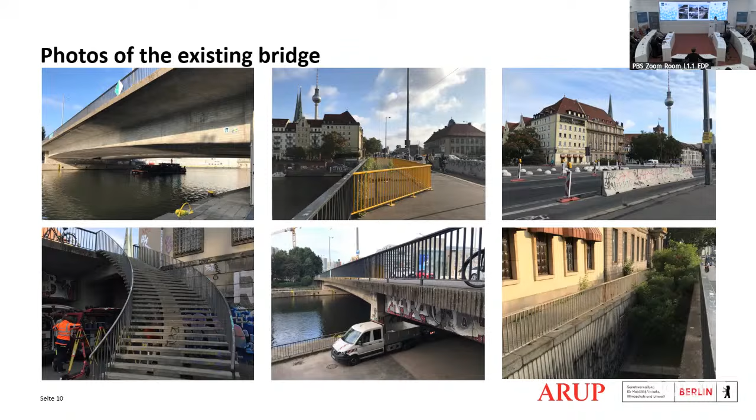So with the change of the means of transportation, the wish of the public, of the residents in Berlin, was to reduce the vehicle traffic and change the functionality of the bridge. So in the future, it will go through two phases. We will initially reduce the amount of car lanes from 4 to 2 on each side of the bridge. We will introduce a wide and safe cycling path and much wider space for pedestrians to enjoy the bridge, also stay on the bridge and enjoy the views.

And in the future, the idea is to bring the public transportation, so tram on the bridge, reduce the car traffic to just one lane per bridge, and encourage people to cycle, walk, and use public transportation.

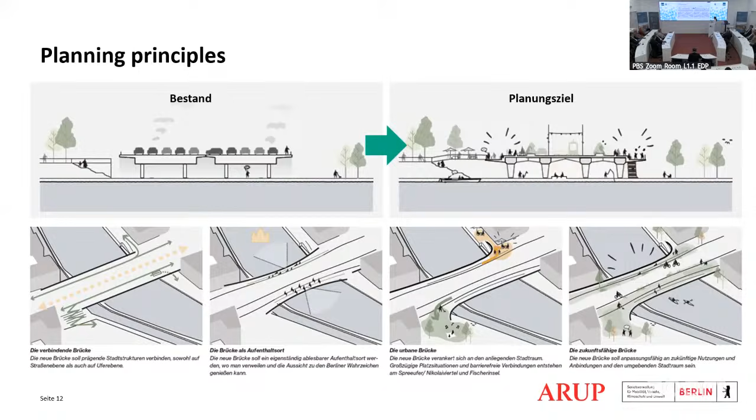I haven't mentioned, but the existing bridge is the third bridge in that location. So we are building the fourth one. And there is a lot of history in the ground as well. So the design of the temporary works and strengthening to the excavations was a different dimension of complexity, to try to build in such a close neighborhood of heritage buildings and structures.

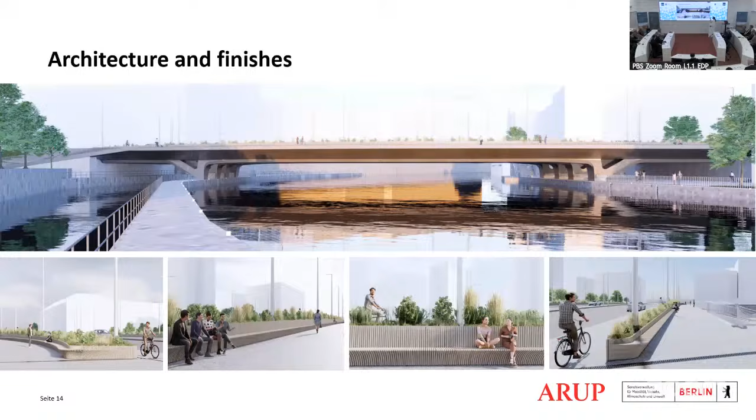So here's a little bit about the engineering behind the design. This is a composite steel concrete continuous beam. Our main beams are steel box girders with a concrete plate on top. These lines do not show a transverse beam. This is just the cladding underneath the bridge. So the structure itself is just the box girders and the concrete slab spanning between them.

Why the cladding? Not a very popular idea nowadays because of the maintenance, but actually this is coming from the approval design, which has developed significantly. We are currently about to award a contractor with the design. The amount of utilities that you can see has probably doubled. We have about 30 or 36 service utility providers or owners who each want to have a pipe, a cable, a space under the bridge because of its location. So that has been a big challenge, trying to fit it all.

And that's why the cladding, to make it a bit more aesthetically pleasing for the users of the riverbanks and also the tourists that use the navigation channel. So the width of the bridge, the existing bridge is 44.5 meters wide. We are reducing the traffic. We are expanding the place for the pedestrians, but we are still reducing the width of the bridge to 38.33 meters. And yeah, I think that's about it.

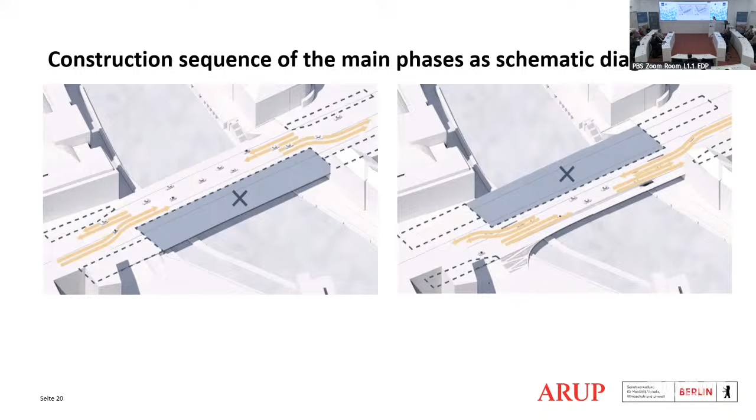They have asked us during one of the meetings to provide what they called the ship maneuvering lines, to prove that a 90-meter long barge can get through the lock, come out and move underneath the bridge whilst we have a big pile drilling machine on a pontoon next to it. So we've managed to do so. It was not an easy thing.

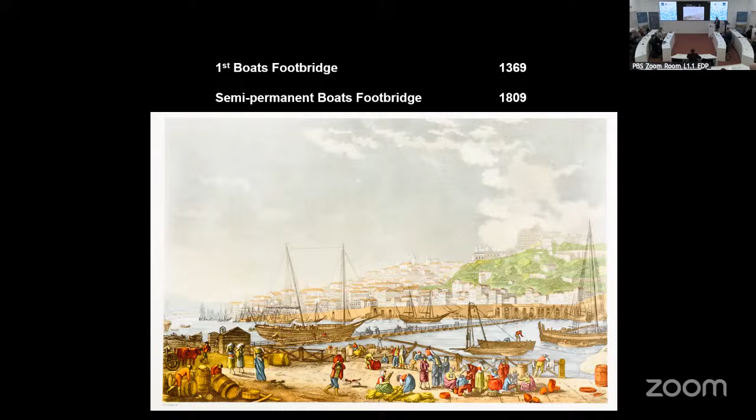It was in 1369 when, well, we are very fond of the people living on the other side of the River Douro, that is nowadays Spaniards. Before they were the people from Leon. We are very fond of them. Yeah, but friends sometimes discuss. And in 1369, an army had to cross the river to help and counterbalance the invasion that was coming from Galicia, nowadays in Spain. But the bridge was built and taken out, and only in the 19th century the first so-called semi-permanent bridge was built.

Well, unfortunately, with that bridge, we have this tragedy when the Napoleon troops came from the north, and the population tried to cross in a hurry, and the bridge was not well prepared to withstand, so several thousand people drowned in the river. By that time, people didn't know how to swim. Something that we forget. Nowadays, we are supposed to swim, but this was not the case in the beginning of the 19th century. So only in 1843 the first bridge was built, a suspension bridge, similar to many others built around the world.

Porto was entering a very important phase in the second half of the 19th century. Porto developed very much, as I said before, thanks to the British that came over here, starting industrialization and taking our port wine to be sold everywhere. Thanks for it. It's a great achievement. So this suspension bridge.

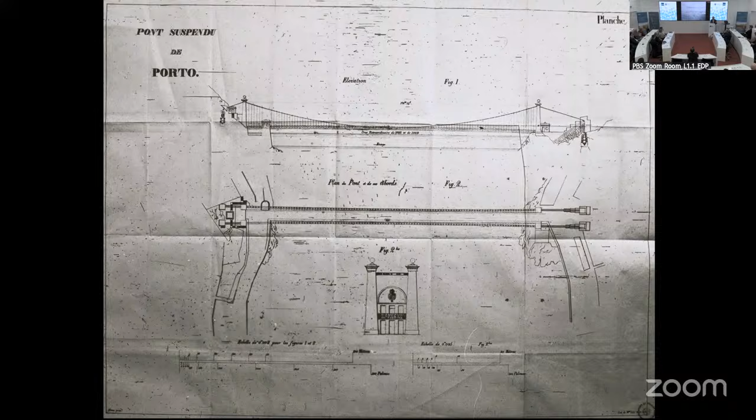What is beautiful with this bridge is also the drawings. The drawings are really to a detail. More than half of it to explain the materials, the pieces that had to be put on the bridge. Nowadays we do much less. Well, the contractor does it later on. But we are obviously not spending time with these drawings. This is already a photograph of that time.

The problem with the bridge was that it was like the Millennium Bridge, and it was difficult to cross with some wind. So apart from that, the durability of that iron, of those cables, was not good enough. Anyway, the city started to develop a lot, as I said, in the second half of the 19th century. So we had to have a crossing down here and also another up there. But a few years before, the train was coming from Lisbon, had to cross the river, and then, well,

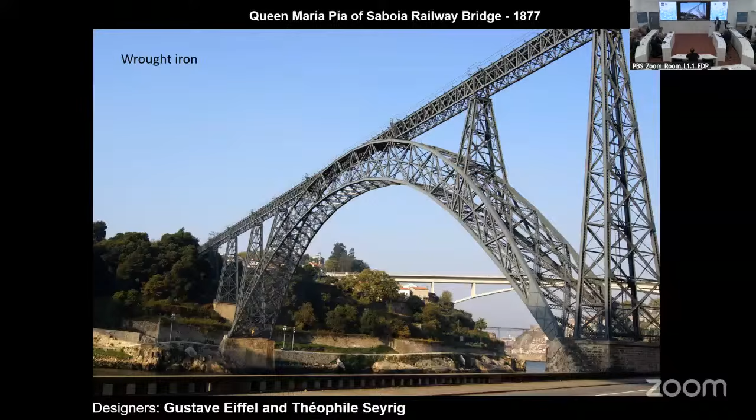So it was in 1877 that we had this big bridge built by the Gustave Eiffel Company. He came up with this splendid work of art. Théophile was actually the engineer, the civil engineer who did the calculations and the drawings. The drawings, because the calculations were graphical, and the precision with which those drawings were made, this sort of graphical drawing, well, young people don't know at all, because now it's not used anymore.

Anyway, this bridge, the way it was built, was built in less than 2 years. Less than 2 years. Gustave Eiffel was no doubt a great entrepreneur. He was a civil engineer, true, but he became an entrepreneur full of capacity, initiative. So this bridge was built in less than 2 years. Amazing. This was never done after that. So in spite of the arrival of electrical machines, etc., this was done only with human force. But this construction, cantilever construction, really is quite something.

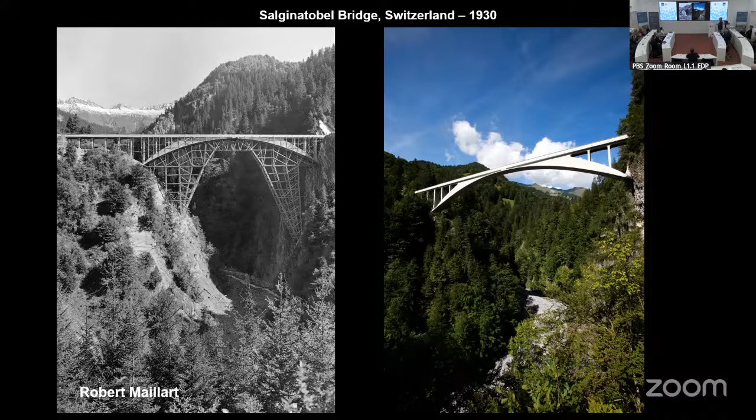I don't know why Robert Maillart comes here. Oh, I know, I see. There is a comment that in any vote on the internet for the most beautiful bridge in the world, the winner is Robert Maillart's Salginatobel Bridge. It's indeed a beautiful bridge in an outstanding location, quite obviously. But the comment is that in this bridge, we have 3 hinges.

But in the one Gustave Eiffel and Seyrig did in Oporto, we have actually just two hinges, which means a hyperstatic structure, and to calculate hyperstatic structures before we had computers was quite something. Quite something means impossible. It was quite impossible. But it was possible by proper engineering and thinking, understanding of the behavior of the structure.

So the bridge was a railway bridge. And then, sorry, I'm not mastering very well this little mouse.

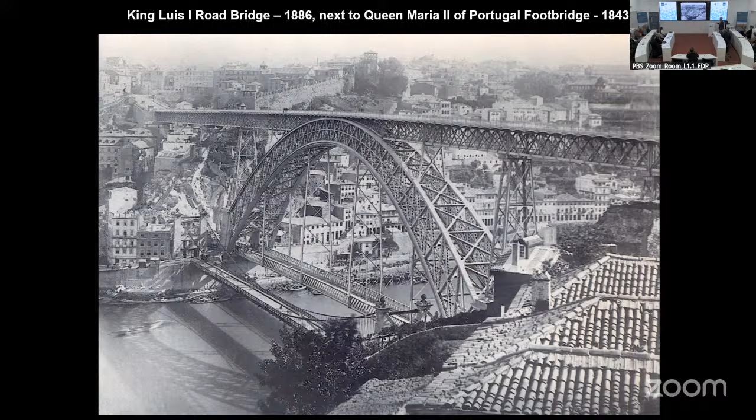Less than 10 years after, this bridge was built next to the suspension bridge already built; the suspension bridge was demolished only 2 years later. This bridge really was designed by Theophile Seyrig. Theophile Seyrig was partner of Gustav Eiffel. Gustav Eiffel took most of the credit. Seyrig didn't like that idea, so he decided to leave the company. He joined a Belgian company, and he won the competition for this bridge, still there. Probably you will visit it. There it is. It's spanning 172 meters.

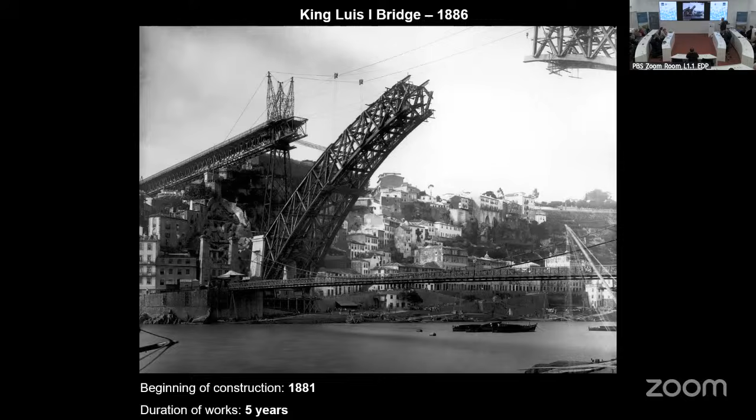We cannot go into much detail, but they wanted the bridges near the city for sure, but they were seeking the location where the river was narrow. Well, I will jump 4 meters, maybe running, but 4 meters and 20, that will be impossible. Any extra centimeter is hell and a big challenge. So indeed, this bridge took 5 years to build. Probably Gustav Eiffel laughed about the time it took to build the bridge. But anyway, both of them are still there. There it is.

The increase in traffic and economic activity on both sides was immense. By the way, the port wine was taken down the river, and the cellars are on the other side. So the wine is here, and most of the population is there. I don't know whether they were crossing because of the wine or not, probably not. But anyway, again, the same hinges, it's also an arch with 2 hinges.

And then, well, the 19th century went. Portugal went into a very difficult period, the end of the monarchy, and then 20 years of chaotic republic. I'm not criticizing the republic. It's just the fact that it was a bit chaotic. It is understood that the monarchy is a stabilizing factor. By the way, Mexicans tried to do it with the Emperor Maximilian, but then a Republican killed Maximilian, and I'm afraid Mexico, a super country, is always in some difficulty. Well, let's move to bridges and leave this difficult subject of politics.

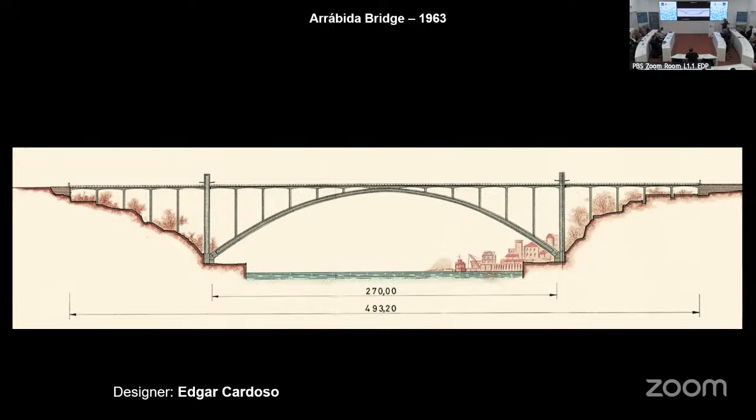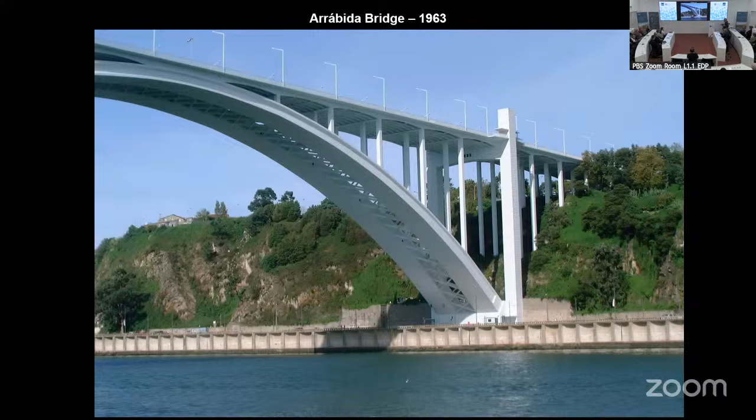It was in 1963 that this bridge was built. The designer, Edgar Cardoso. This bridge is located in a fantastic scenery. We have the mouth of the river down there. It was a world record when it was built. But world record is just a matter of curiosity, nothing more than that. And for the Guinness Book, they need to publish new editions, so they need world records. It's actually made up of 2 arches. The arches are very strong. They are self-supporting. They are 4 meters thick at the bottom and 3.5 meters at the top.

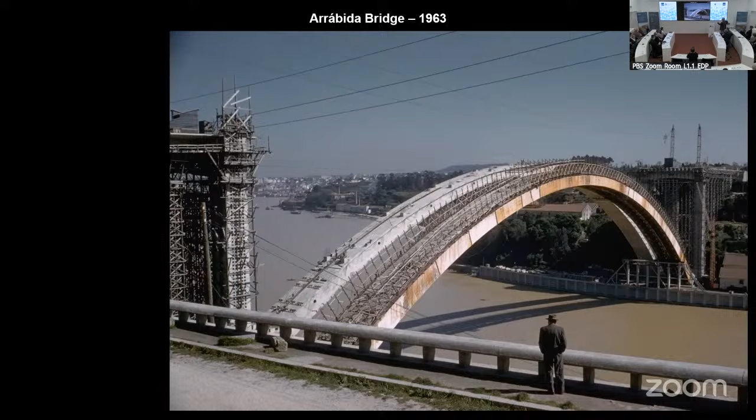The way it was built: with a temporary steel arch, then they did the concrete on top, then they moved the steel arch to the side, and they did the second concrete arch. And after having those arches, self-supporting and very strong, they built the deck with a normal scaffolding, as we see in here. There it is, the bridge in a super location. It's really outstanding, this bridge.

And it was in 1991 that we had another bridge, a railway bridge, where the train was taken from the Maria Pia Bridge, the Eiffel Bridge, and moved to this bridge. There it is, down there. Of this kind, and being a railway bridge, it is still a world record, 250 meters long, the central span.

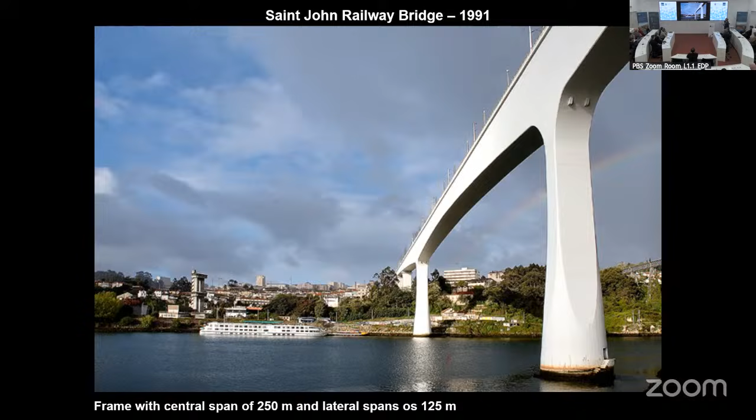Beautifully done. It may be a joke, but Edgar Cardoso said that the idea of the columns came when he was preparing to eat a carrot. Whether it is true or not, it is an interesting story. It's quite elegant, this bridge, no doubt. And the construction is a cantilever system, nowadays very common, 250 meters. You have longer spans, but not in railways. There we are, next to the 2. The train was going on the right, and now going on the left side.

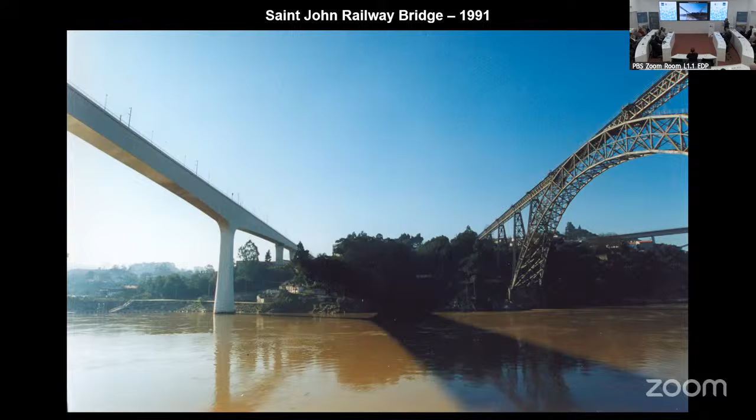This bridge is because we have Edgar Cardoso here on the left, and Fritz Leonhardt, which is obviously a well-known bridge designer, and I'm the one in the shade behind. That was 40 years ago, I'm afraid. Oh yes, 40 years ago.

And there we are, the bridge, the St. John Bridge. And then it was already in this century that we were able to have another bridge, the Infante Dom Henrique Bridge, a road bridge. It was built so that cars could be taken from the Luís Bridge, where the metro now operates.

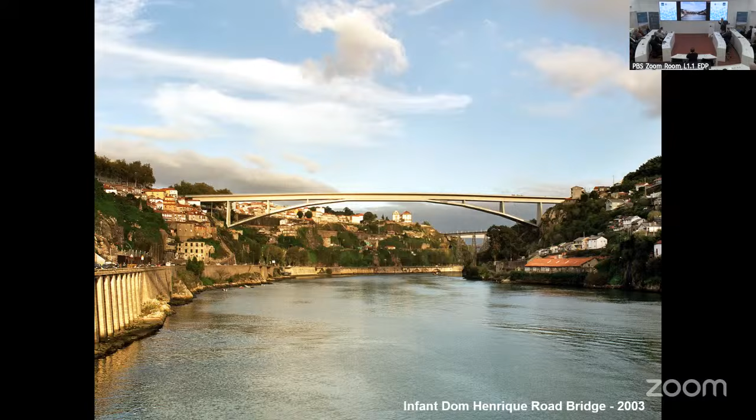This bridge was actually based on Robert Maillart's concept of a very shallow arch, a very thin arch, and the arch is not self-supporting. It would decompose if left alone. So it is the deck, the strong deck, that keeps the arch in position. And if it is in position, then it gets only compression, 95% compression, and then concrete is an excellent material. The designers are nowadays working in one of these companies.

Sorry. It's just a nice picture.

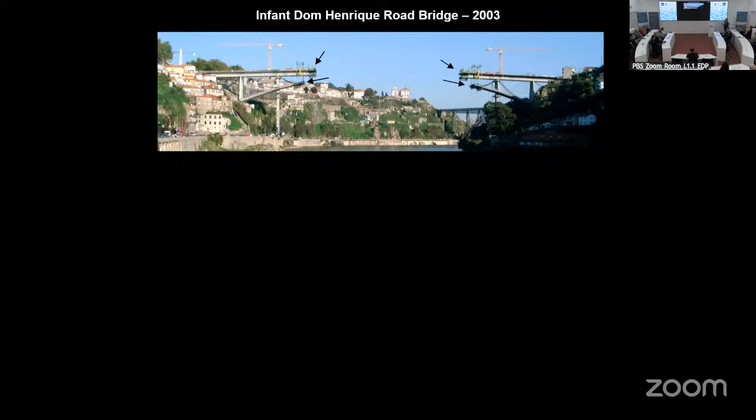In here, because the arch is so delicate, it could not be built in front of the deck during construction. It had to be hung from the deck, so the deck was ahead of the arch until they were united and finally closed. So it was quite an achievement, and provided some beautiful pictures. It took 3 years to build, so Eiffel was much more successful.

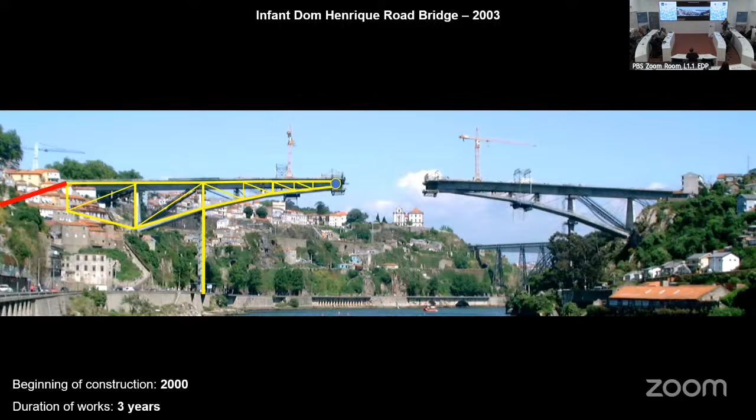The construction was possible because with temporary cables and temporary struts, we actually got a truss. And the truss is the most effective, efficient structure. After being united, there it is when the two sides are already connected, but we still have all those cables and temporary struts, like one in here, and the cables; they were all taken out.

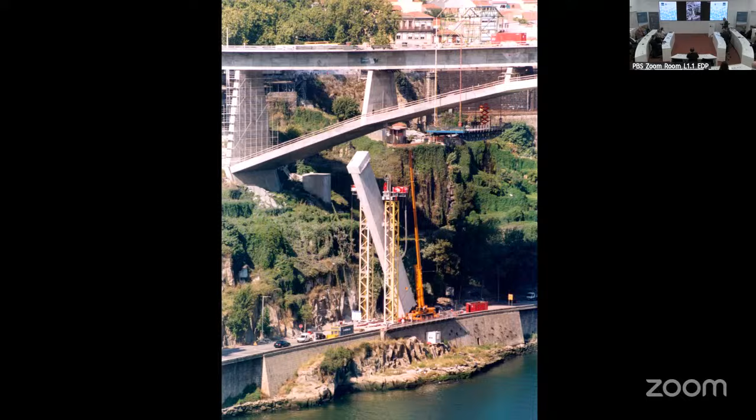Sorry, this is when this temporary column was taken down. The contractor decided to do it on a holiday over summer, because if anything goes wrong, it is better: all the newspapers and TV are on holiday. Just in case. Nothing happened, it was a success.

Amazing. Oh, sorry. Well, let's go ahead. Time is running short, and I don't want Renato to be without any time. And I still have a couple to go.

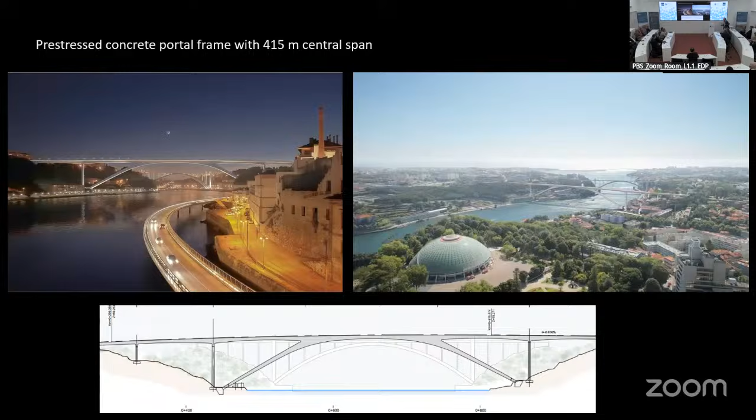It's an enormous bridge. It's got a span of 415 meters. It will be an immense bridge, no doubt. Well, we're not going into the detail. It's not exactly an arch, it's more like a frame. Although we have that shape of an arch in the middle, it's mostly more a frame than an arch. Construction is well known, with temporary columns and stays for the progressive construction, and here the picture of the bridge.

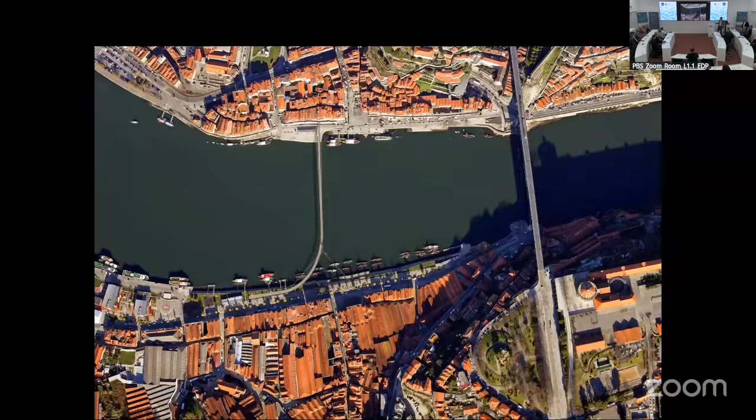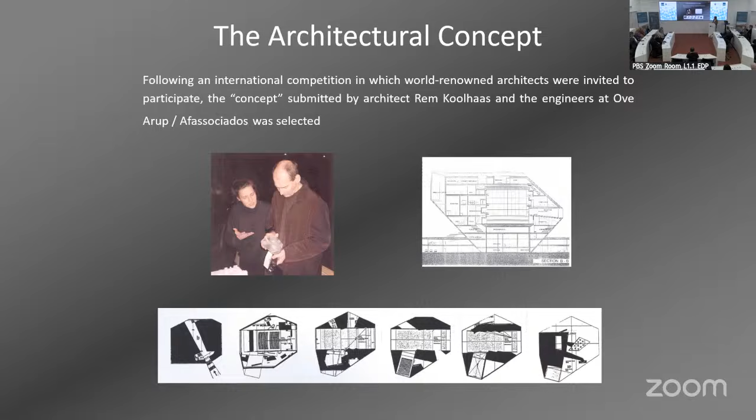So I will just try to speak a few minutes about two major structures that we have here in the north of Portugal. Both structures are, we believe, a good example of exposed concrete, one in white concrete and the other one in ordinary grey. The first one is the Casa da Música here in Porto. The architect is Rem Koolhaas. In the competition, Rem Koolhaas joined Arup and also our former company Afassociados, and the proposal from Rem Koolhaas was selected with that very unusual shape.

At the beginning, the idea was to have something that was not in concrete, some steel structure with some transparency. In fact, he didn't think about white concrete from the beginning, because in the north of Europe the skills and the labor needed to do good exposed concrete were not so common. But here in Portugal, fortunately, we had it, and I think we still have that knowledge, and the idea of changing it to white concrete was very welcomed by the architect.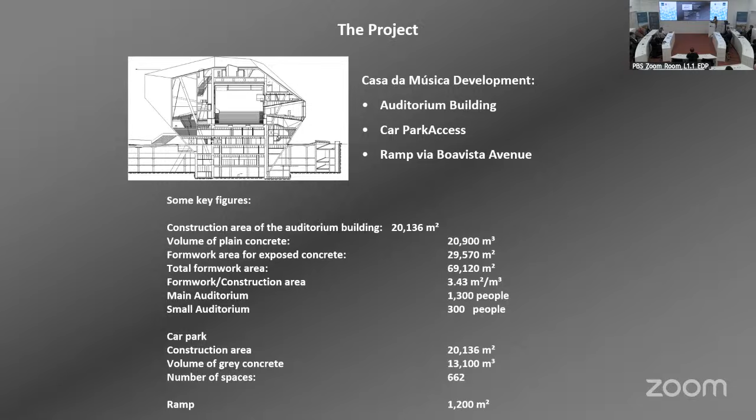We don't have time for much, just to explain. We have more or less 30,000 square meters of construction. What we see above ground is only a part of the building. The building is a concrete shell, entirely showing the structure, and that was also the idea since the beginning, to show the structure, and the structure would become the main architectural element, or the main architectural sentence, shown to the public.

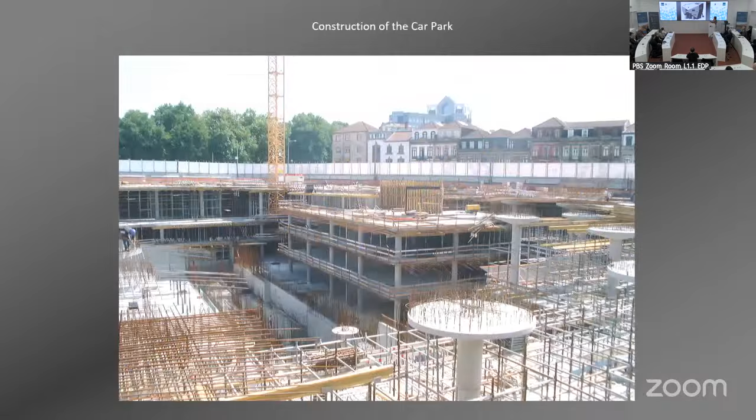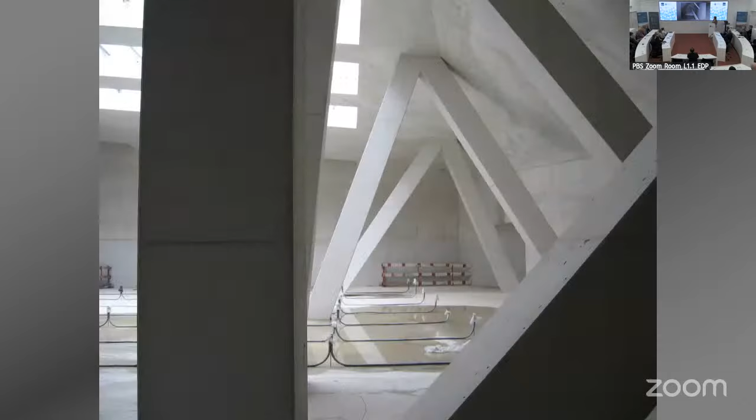The stereotomy of the exterior was also imposed by the architect, and the quality of execution was a major issue since the beginning. The result is quite good, as you see that volume in that place, the quality of execution, and the difference between the architecture of this new element and the consolidated other buildings. I think it's a very nice example of what can be done when architects and engineers join and collaborate to lead to this result.

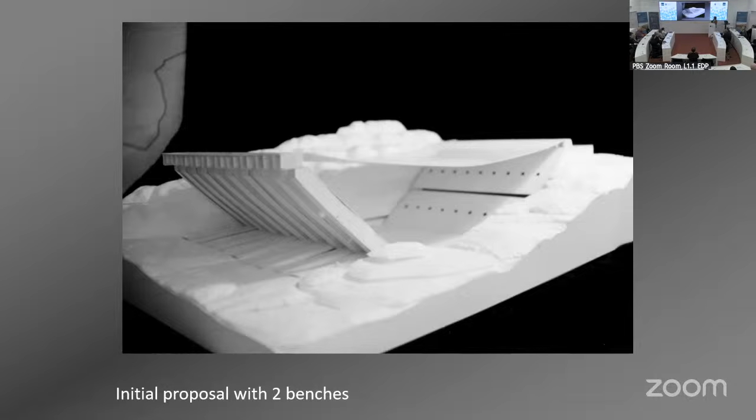The other example is the new Braga Stadium, built for the Euro Cup of 2004. The architect is Eduardo Souto de Moura, Portuguese Pritzker Prize winner. The idea was to build a two-stand stadium with a roof that should be as thin as possible. So the idea was to have a big excavation on the rock on one side to create an amphitheater that could be used for one of the stands, and on the other side cantilevering the other stand, helping to anchor the roof cables and to be stabilized between the self-weight and the force of the cables.

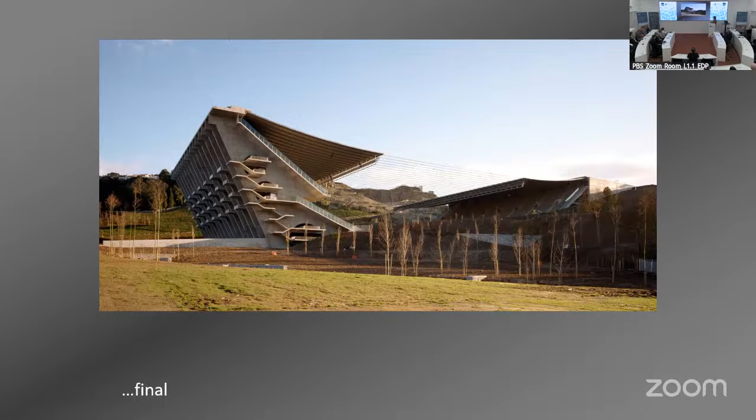Similar suspended roof structures include many examples: the Foster Dulles Airport in Washington, the Portuguese Pavilion in Expo 98, and inspiring structures like the old bridges in South America. We have a roof that spans 202 meters.

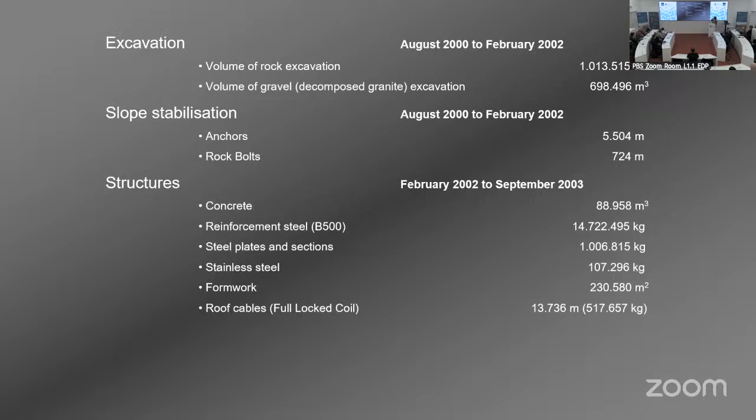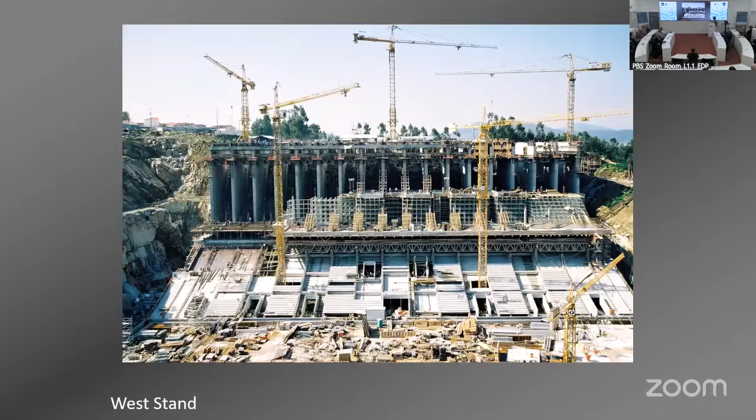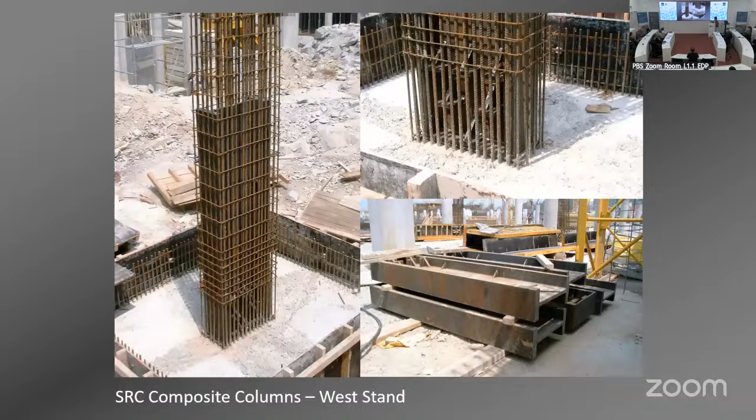We have more than 90,000 cubic meters of concrete, everything exposed concrete, including the excavation on the rock. We have one stand that is directly anchored on the rock, and the other that is cantilevering. Everything is exposed—not only the concrete itself, but also all the details, all the connections, everything with technical meaning. The architect chose to expose everything, even in some cases the foundations, the anchors, the structure—everything is exposed in this building.

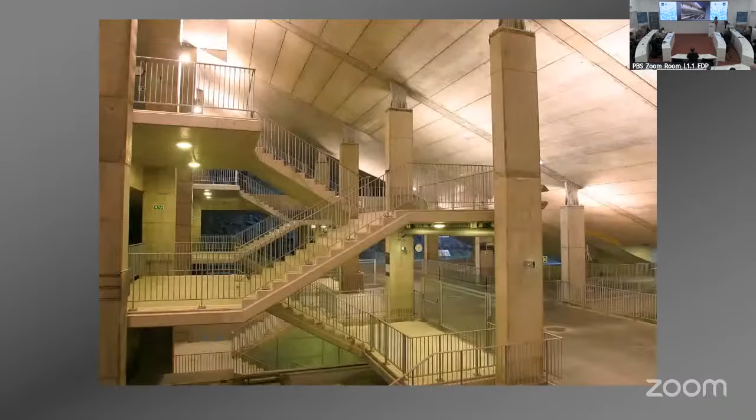The main issue about this stadium is the wind stability of the roof. This was since the beginning perhaps the most demanding engineering issue. Several models were done to study the behavior of the roof. At the end, there was some discussion during the design between different models and different results, between the deterministic analysis and the stochastic analysis. But in the end, it was proved that the roof is stable. It was monitored and is still monitored.

The result of this issue about structures and architecture, and showing everything that has a structural meaning, in these two examples, I think is a good example of how the collaboration between architecture and structural engineering can give this excellent result.

Thank you very much. I'm in big trouble now because those were some really good presentations—an amazing new bridge, a fantastic history lesson, an auditorium that looked like it landed from outer space, and a really cool football stadium. So I'm John, I'm from Copenhagen Metro, and I'm going to tell you a little bit about what we're doing with sustainability, innovation and carbon on Copenhagen Metro. I could have given a presentation that's really technical, but you've just seen some really cool technical stuff, and I can't hold a candle to it today.

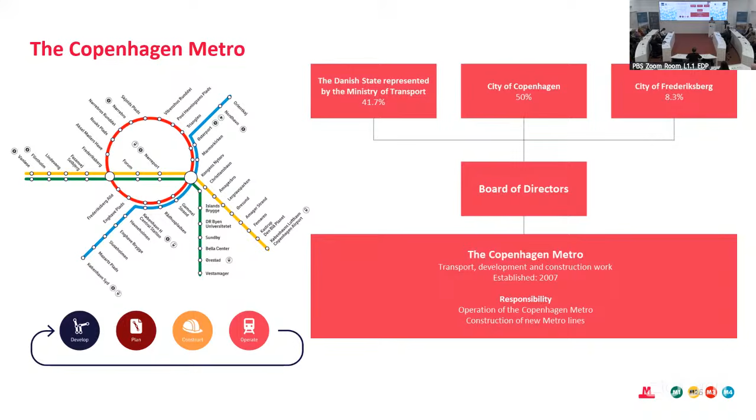A very short history lesson. I'm going to skip the map. If you've not been to Copenhagen, the colour lines are the metro and the grey lines are not the metro, but that's where we're going. These metros are fairly new.

I can't do a history lesson from 150 years ago, but I can tell you the first metro opened in 2002 and the last one opened in 2024. Why is this important? Because we're about to embark on the 5th metro, the 5th generation in Copenhagen.

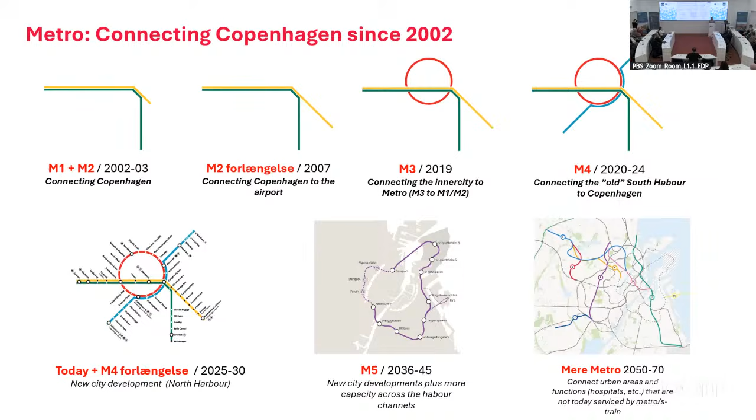And this is all in living memory. We have a team that delivered this in Copenhagen. It's not just that we did it, we know the people that did it, they're still sitting at the desks around us. So this isn't my first rodeo. I was involved in M3 12 years ago. The guys from M1 and M2, who were there 25 years ago, sit by our sides. So we have the knowledge of what we did last time, so we can learn from it for what we did this time. That's important too, for something I'll come onto a little later.

A few other things, apart from building a world-class metro - I could tell you about how we run the metro but I'll skip over that since we're running short on time. I'd like to say two things: firstly, we're a 24/7 operation, which is quite special. Secondly, our customer satisfaction is at 98% and operation stability is over 99%. If you know any other metro doing that, let us know, because we need to learn from them - our targets next year are higher.

We don't just do the metro, we've also opened a light rail system in Copenhagen. The south half opened in October last year, and the northern half opens sometime this year - don't pin me down on it, I'm on a live video, I'm not going to give you a date.

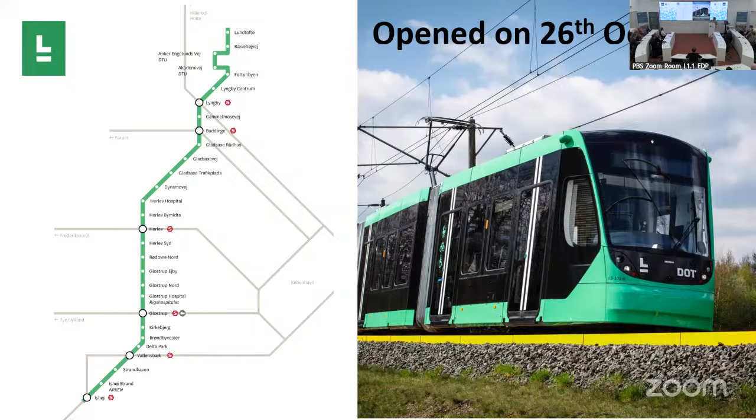Something else we do is work closely with the commune to help with their planning. When you build a metro, you don't just build it and let the city go around it - you do the development and planning together. So as well as designing the metro, we've got a planning team that works out what it's going to look like. I could show you slides of what metro lines 6, 7, 8, 9, 10, 11 will look like and how the city will develop around them. We have a Metro 2070 plan for what happens next, and next after that, because we want to build a city, not just a metro. We're obviously a key part of that.

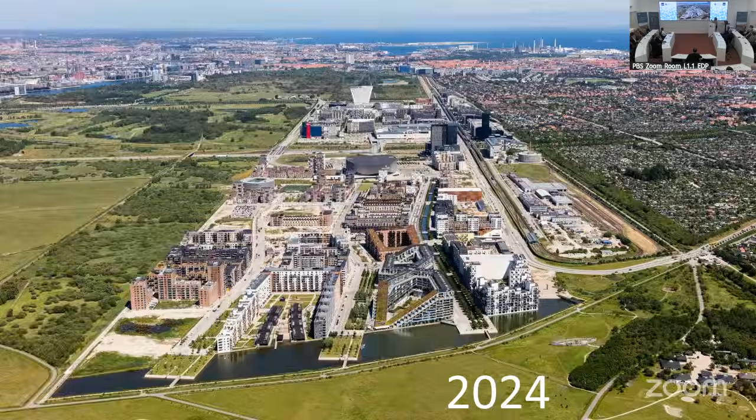Enough about that. I want to talk about M5 Metro, innovation, carbon and sustainability, all in one big thing.

I joined the metro about 2 years ago. I used to be a consultant doing metro design, and I used to do lots of little studies for them to help them deliver design and build a better metro.

They had an idea that the next metro, bear in mind the last metro is 2024, should have half the carbon footprint. This is doubled down on by our CEO, the chairman of our board, who said we can do this. We might have to take some risks, but we will make sure we take the right risks, the right level of risk, and those risks will be low. We need to learn and make sure those risks are acceptable.

So don't go crazy here, but we can do it. Let's educate ourselves and do better than last time. A bold statement, but we are well on our way to doing it. So I'm going to try to show you how before I get thrown off the rostrum.

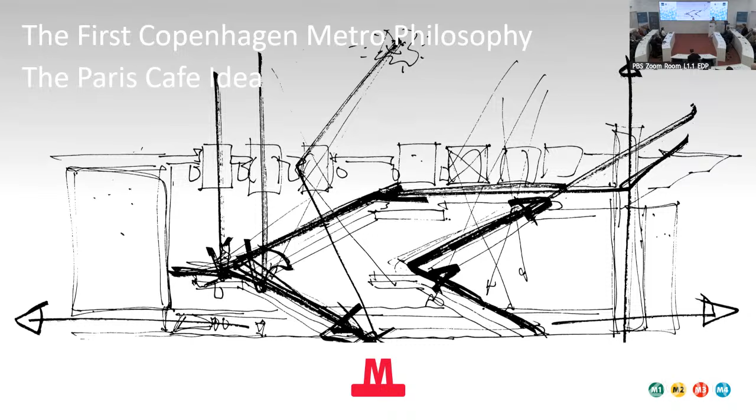A little bit about the M1 and M2. This is a sketch that was done in a cafe in Paris in 1996. Let's go and do a really simple metro. It's a watertight box. It's got some escalators, some skylights, and the metro goes through it. Really simple, modular design. If you've been to Copenhagen, it's quite a cool metro. It's simple, straightforward, easy to navigate, and it was a roaring success.

When we did metro line 3, the objective was more of the same, please. It actually says that on the design brief: we want more of the same. We like it, everyone likes it, let's do that. The problem with more of the same, the problem with modularization, is it's not optimization. So if you do all your stations like this, which is what we did 20 years ago, they're not necessarily perfect in terms of the carbon footprint and sustainability, unfortunately.

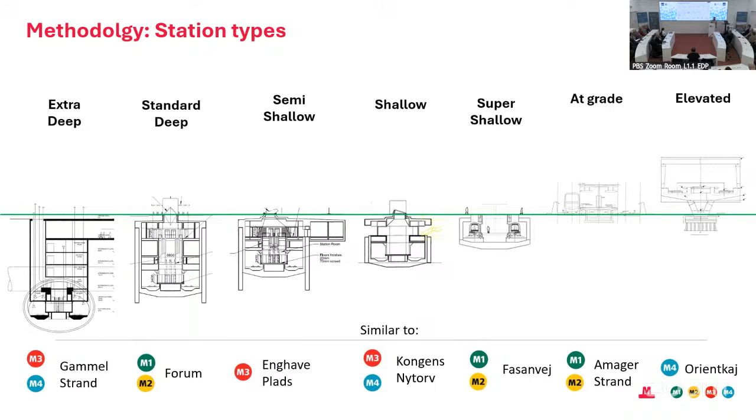So this is the plan for Metro 5, and you can see without the details, we've got 7 different metro stations. They're totally different, they're not optimized, they're not modular - they're optimized for each different location. You've got a really, really deep one that's like a shopping centre over here, some semi-shallow ones here, but each of them suits the geology. I wish I had a geotechnical long section, but I forgot to put it in - we go up and down to make sure we are as shallow as possible.

It's potentially a bit more risky on the tunnelling, but it saves so much. Modern tunnelling technology is up there that we can do this. We're not worried about it. It's good.

I'm going to skip over that one. I quite like this one because we're going to put some more bicycle parking in. We're going to use the space between these boxes to utilise it, so it's not just digging a big box and making a hole and filling it back in again. We're taking full advantage of the space that we create.

So the cycle parking - if you've been to Copenhagen, we're full of bicyclists - we're giving the people what they want. That was a request from the Copenhagen city.

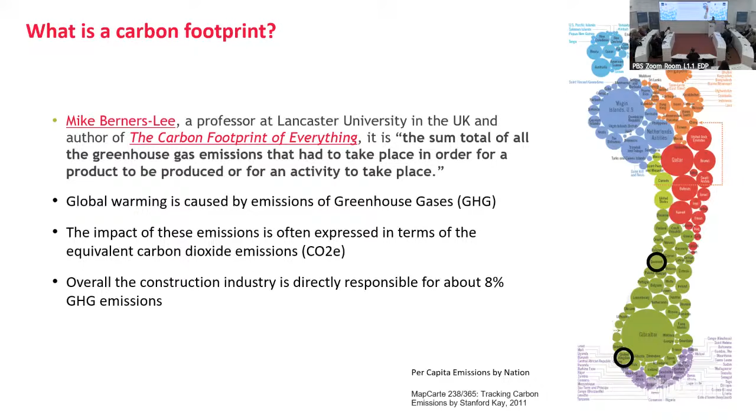The point is, even though the UK and Denmark aren't the worst, they're not the best. So we should try to do a bit better. When we're talking about the carbon footprint of a metro project, most of it actually comes from construction, which is probably known for most projects, from construction, not from operation. And out of that, most of it comes from the concrete and steel. I mean, this isn't rocket science, I think probably all know that.

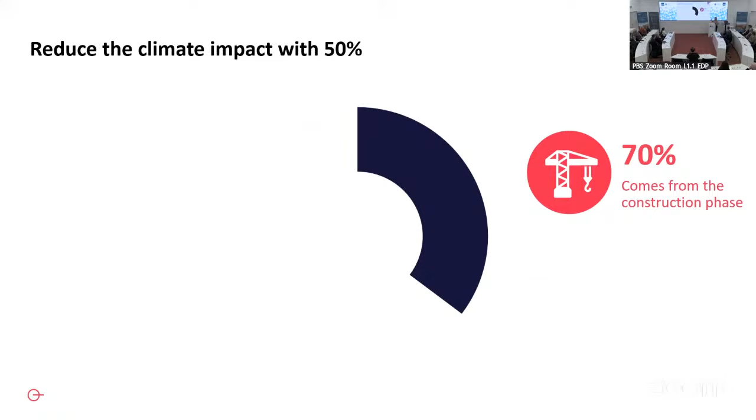So when we're breaking this down, we are trying to take that off by half. That's the 50% saving. It's important to set these boundaries so you know what we're aiming for. It's not those other things, because the other things will come later. This is our target that we've established. So we're not doing it blindly.

If you look at some of the other client organisations, they're setting similar reductions, and some of them have got different baselines. So the city of Copenhagen sets a similar 50% reduction in their carbon by 2035, which is kind of where we're aiming the metric. So it's not our idea, it's been put on us by the client to compete with other clients around the world. So you can do the detailed numbers, are we doing better or worse? By the by, we're aiming for 50 for the next metro.

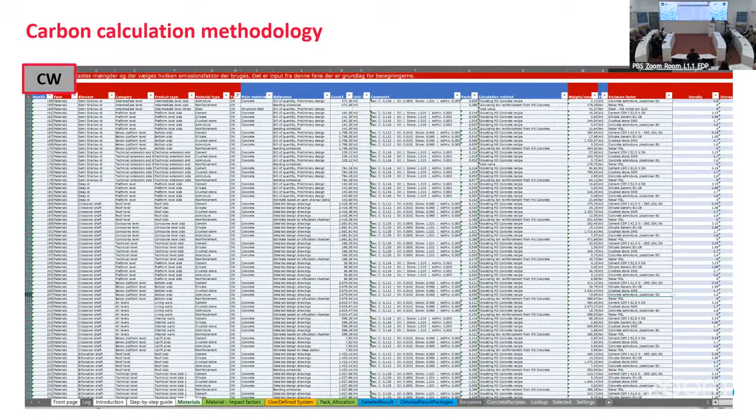I'm going to skip over that for time. Yeah, here we go. So how do we do this? It's worse than that because there's loads of these.

To do this, we've actually made sure that we measure the carbon footprint based on the way we did it last time. We can do that because we've got the bill of quantities from the last metros. So this is the trick. Our carbon footprint is linked directly to the bill of quantities. Oops, I've skipped. Yeah, that's okay. It's linked to the bill of quantities so that we can measure it as we build it. So we had our metro design in the old way from 2020, and then we said, okay, how do we get that down? So that's our baseline, and now let's look at changing things up.

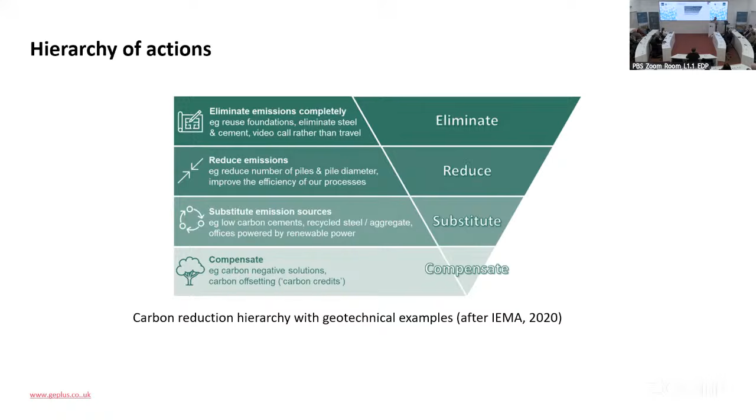And we can break any of those down. If you're familiar, A1 to A3 is the sourcing, A4 is delivery to site, A5 is your carbon on the construction site. So we've mapped it all. And when you map it all, you can work out how to save it, which is how we're doing it in a nutshell. So eliminate, reduce, substitute, compensate. These are traditional ways to go and help reduce your carbon footprint.

I'm going to go. How am I for time?

Cool. Innovation. So I run an innovation team, and we've been doing innovation studies for maybe 5 years now. The innovation studies have been looking at problem areas and drilling down to learn more about them to see can we do better than last time. So the trick was that if you can see a problem, let's scour the world and try to find a better way to do it. And the ways to do it are multiple. I'll skip through that, I'll get back in a minute. You can do it by just clever design. You can do it by using cool futuristic materials, or maybe you can do it on the construction site by saving it in other ways.

If you look at how many were there and what they meant, it's our way of getting down to that 50% reduction. And it's phenomenal. We haven't built it yet, so we'll see how it goes. But as a hard requirement in the contract, we think they're doable. We don't think they're crazy ideas.

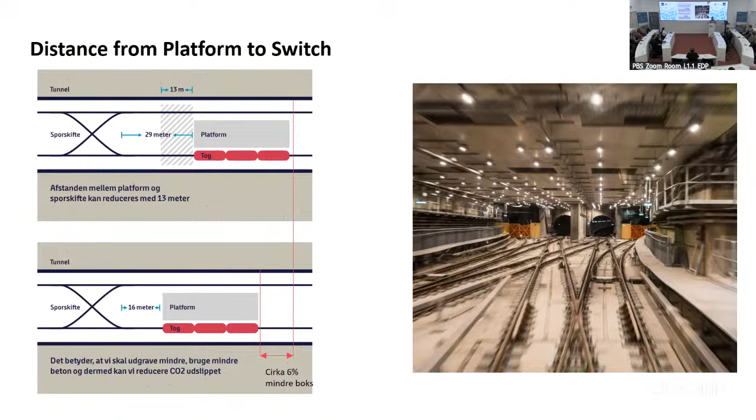And they reanalyzed the train speeds, and they came up with a 13-meter saving. That's 13 meters of a really deep station box that we're not building at all. But that took collaboration between the transportation railway guys and the civil guys, who historically are usually on different planets when we're designing a metro. This was a big deal, and we've done it everywhere we can.

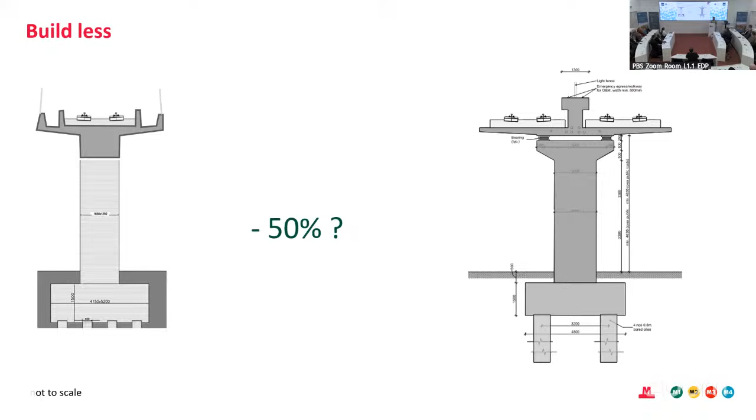And that's fantastic. Again, you're saying it's not innovation, but you know what we're always doing as designers? We're doing copy and paste from last time. And what we're not doing here is that. We're trying to do it afresh and get it right.

I'm going to skip that one. That's just about using modern materials. This is quite brave, to use modern materials, because is it really market ready? We're only putting in the spec the ones that we know are market ready, because a lot has changed in the last 5 years. It's brilliant. Some of the suppliers are coming up with the goods that will save the carbon. I'm really happy about that.

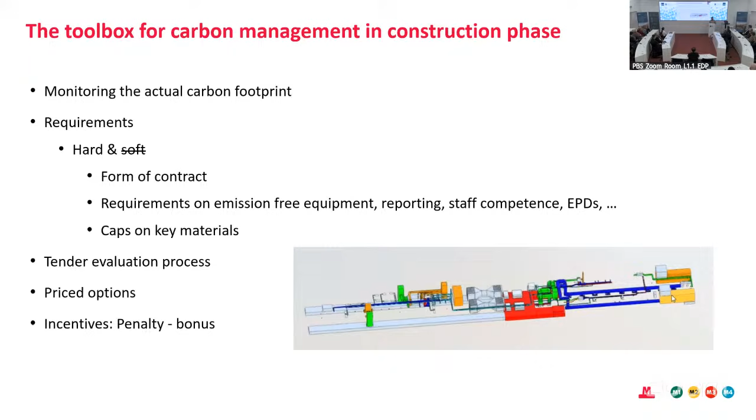Now, the trick is when we're going to be building it, we need to monitor it. Otherwise, it's all for nothing. The project will go to tender this year and get awarded next year. When we start construction, we've got to keep an eye on it, otherwise we can't say. So that's why the carbon footprint is linked directly to the bill of quantities. So when they're there building it, just like they're reporting on the cost and the quantities, they can also be reporting on the carbon, which is an excellent way to do it.

Possibly one of my final things, electric vehicles. We're going hard on electric vehicles on the Copenhagen Metro. On our existing projects on the M4, we used some small electric plant. This is one of our electric kits wrapping up some of the station works. We're going to go a bit bigger than this.

We're going to have requirements to say not just this many vehicles must be electric, but this quantity of energy consumption will be electric, or I should say low carbon. Actually, it's not just electric. It could be low emissions diesel as well. But we will set some requirements that mean that we are not just asking for what the market can handle, that we're hopefully pushing the market a little bit.

So we're part of an initiative together with Copenhagen where, instead of just seeing what the market can do, we're trying to lead from the front. So hopefully this will work, and we're hoping other clients will also say, well, if they're doing it, we'll do it. And by doing that, we will develop the whole industry by getting more and more low emission vehicles.

That is all I had to say, apart from some conclusions. Sustainability is more than just carbon. And if I had more time, I'd talk about resources management, because in Denmark, we do not have very many natural resources. So sand and gravel is in very short supply. There's been discussions about using GGBS, but we haven't got any. So we are thinking about more than that, and we do have resource requirements in our tenders.

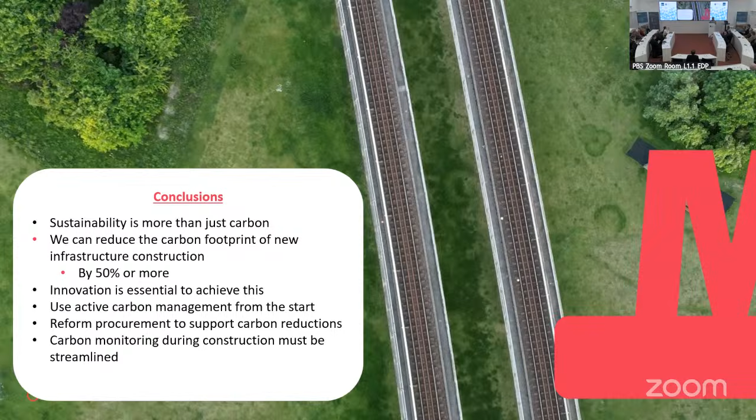So I'm afraid you've got another John now, but the good news is I'm the last John before the drinks break. So I'm talking about CERN, the particle physics research laboratory. I'll introduce myself.

I'm from the UK, civil engineer, worked for a tunnelling contractor for 10 years. My last job was Canary Wharf Station in London, and I joined CERN nearly 30 years ago for the Large Hadron Collider, and I'm the Switzerland country rep for the ICE. So I'll give a quick introduction about CERN, talk about our existing tunnels, one slide on tunnel asset management, so maintenance and monitoring of tunnels, and then a couple of slides on our future plans.

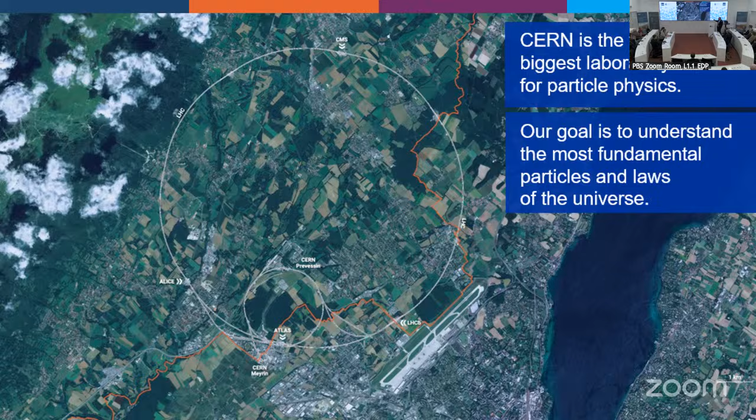So CERN is the largest particle physics laboratory in the world. There's many labs that are similar: Chicago, Hamburg with DESY, Japan, but CERN is the biggest one. And the goal of CERN is to understand the most fundamental laws of particles and the universe. It's nothing to do with making nuclear bombs, nothing to do with electricity, just pure research. You can see the tunnel, that's the Large Hadron Collider, 27 kilometers, straddling the French-Swiss border, Geneva Airport, and at the bottom Lake Geneva.

So CERN is underpinned by 4 major missions. Obviously, the main one is research, physics research. But the other big part of CERN is education and training. We take a lot of young engineers for 2 or 3 years, and they go back into industry. Technology and innovation, not just research. There's many spin-offs from CERN, like the World Wide Web. Hadron therapy for cancer treatment was developed at CERN. But the big part I'm going to talk about is collaboration.

So CERN is a big organization, international. It was founded in 1954, just after the Second World War, to get physicists working on something peaceful after the war. Started with 12 member states. It's now grown to 25. Budget about 1.2 billion Swiss francs, so equivalent to a medium-sized university. 2,700 staff, 1,200 graduates, but 14,000 users all over the world looking at physics data. It's a very diverse organization, 110 nationalities.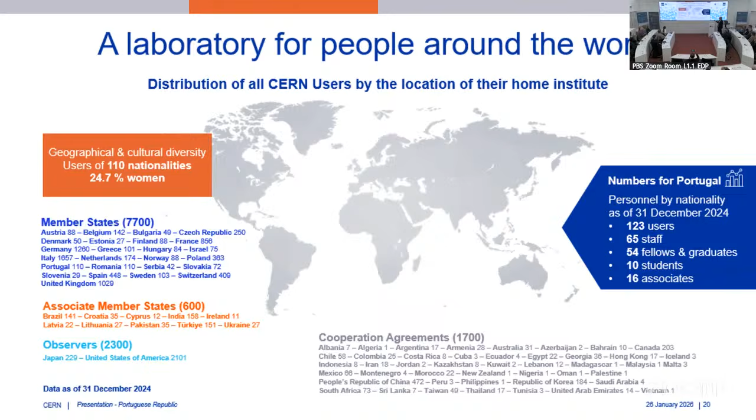And Portugal is a very big part of CERN. Been a member for 40 years, 123 users, 65 staff, and you can see the numbers there for the other attributes. And in fact, we just celebrated 40 years of Portugal at CERN in January. The Portuguese Minister of Education, Science and Innovation visited CERN. We met our new Director General, who happens to be British this time. You can see this laboratory in Portugal is a big part of CERN, not just in the Large Hadron Collider, but also many other experiments at CERN.

Very successful engineer and teacher training program, and a very well-balanced return. What we mean by that is CERN checks very carefully how much a country puts into CERN, to make sure they get a fair return, either in staff or industrial contracts. And we call Portugal well-balanced, getting a good return in staff and in contracts.

So now I'll talk about a tunnel. So the Large Hadron Collider is a 27-kilometre ring, about 100 metres underground on average, with a superconducting magnet, so a helium machine, accelerating particles in 2 different directions, circulating close to the speed of light, and then the magnets kick the beam in and make it collide into the middle of a detector in these big underground caverns. Basically a very large camera.

The physicists analyse what comes out of the collision and look at new research. You might have heard about the Higgs boson discovery a few years ago. It was discovered in one of these detectors. That's an aerial shot. Airport's at the bottom this time. The Jura Mountains are in the background, and we have 4 detectors: CMS, ATLAS, ALICE, and LHCb.

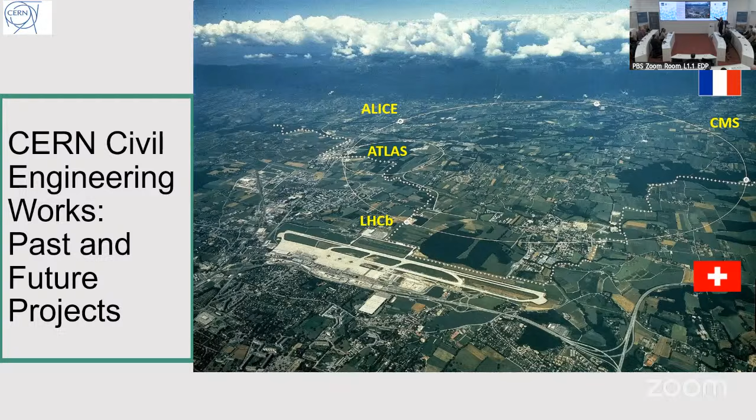But it's not just the Large Hadron Collider. In total, there's more than 70 kilometres of tunnels building up to the Large Hadron Collider, with more than 80 caverns, and we employ 50 civil engineers at CERN.

The geology, so one of the reasons why CERN was picked after the war for the centre is because we have good rock. The majority of the tunnels are in what's called the molasse rock, which is sandstone marl type rock, which is good for excavation, relatively dry and stable. But it does have some nasty properties like swelling, creep, and squeezing, so you need quite a lot of primary and secondary lining. On top of that, we have the moraines, which are glacial deposits for the shafts we have to go through first to get down to the good rock.

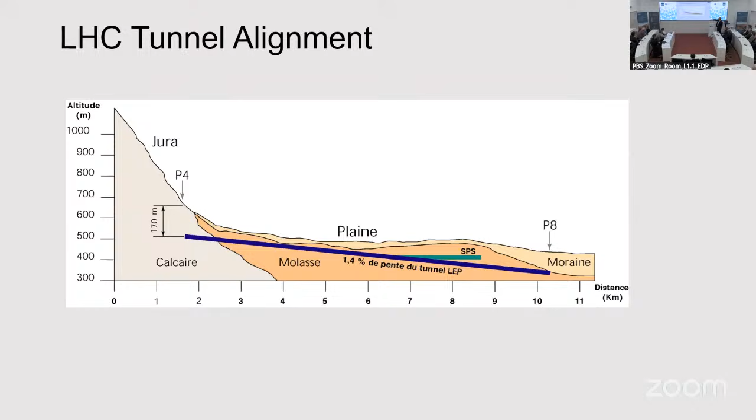Our tunnels are normally inclined, like the Large Hadron Collider is inclined at 1.4%, to make sure it's in the good molasse rock as much as possible and to minimise the depth. But just one section goes into limestone where we still have lots of problems today, leakages.

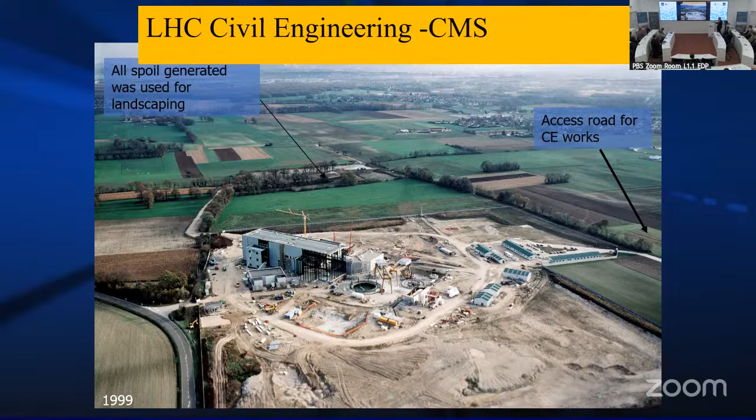Sustainability, even back then, was a consideration. We made sure all the spoil that came out of the underground was stockpiled permanently and landscaped. We recreated a nice Roman footpath, built water retention basins. It's very nice. The people are very happy with the finished product.

So for the shaft excavation, we had to go through these glacial deposits. So we used a ground freezing technique, drilling pipes right down to the rock through the glacial deposits, about 60 or 70 metres. And we circulated salty water or brine at minus 23 degrees centigrade down these freeze pipes until the water in the ground started to freeze around each freeze pipe.

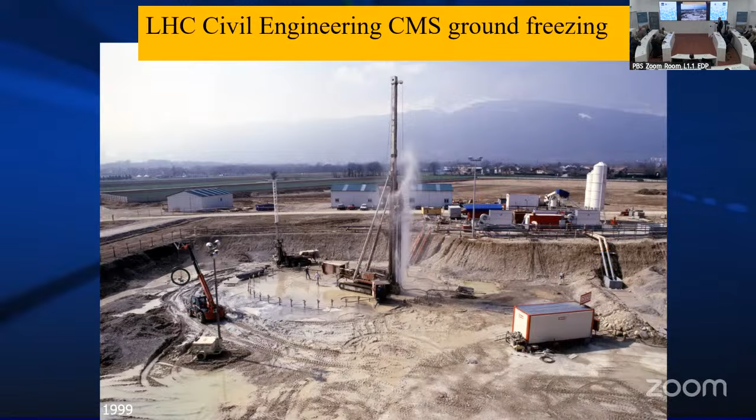Eventually, you can see the ice here formed. The contractor started excavating, and a wall of ice was stopping water coming in and also acting as a retaining wall. That was the theory. Unfortunately, a lot of water came in. We lost over 6 months on the contract with nitrogen injections, bentonite walls, but eventually it did work.

If you visit CERN now, unfortunately, you can't see the civil engineering anymore. It's filled with physics equipment and detectors, but it was very impressive at the time to see the excavation complete. For our excavation, we use either rock breakers or road header for the smaller tunnels. Don't use any explosives because it's quite a soft rock.

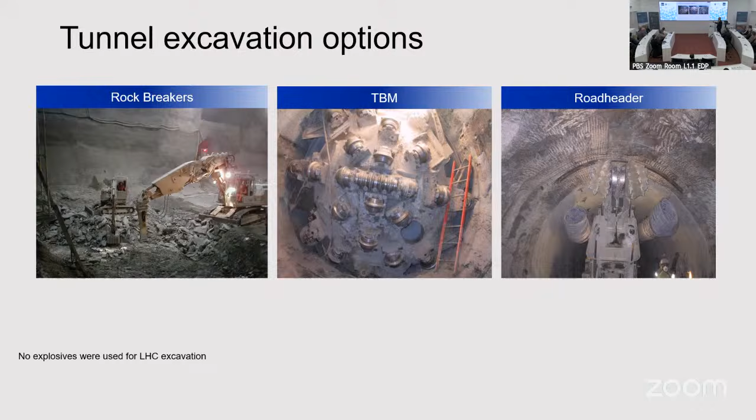The new shaft in a tunnel about 300 meters long, connecting tunnels. The same on the other side, on the Swiss side. This is all finished now. We just have to do some drillings down to the LHC, some cores to connect this new facility to the old one. And this is going to be a big increase on luminosity for the Large Hadron Collider. So that means there will be many more collisions per second.

So now the tunnels are shut down for 2 or 3 years. This is a very good time if you get the opportunity to come to Geneva to visit the underground in the next couple of years. It should be a lot easier to get underground to see the tunnels and caverns.

One slide on tunnel asset management. So because the tunnels are getting very old now, we're doing a lot of work with monitoring and maintaining the tunnels. We have a nice collaboration with University College Cork on machine learning. And we're doing all sorts of research and development on fiber optic monitoring, drone technology, using robotics in the tunnel, etc., to keep an eye on the tunnels to make sure they last for the future.

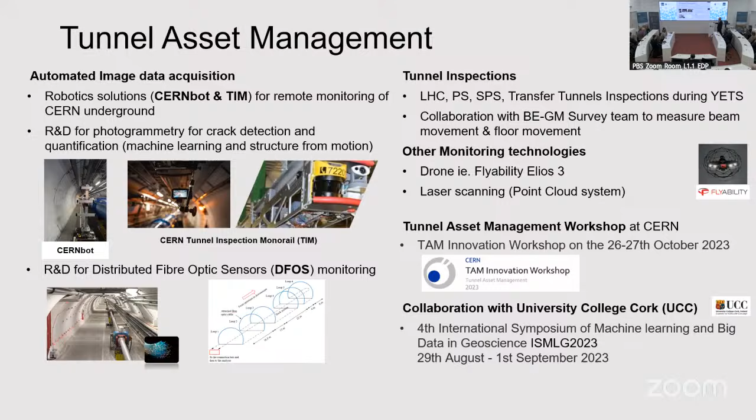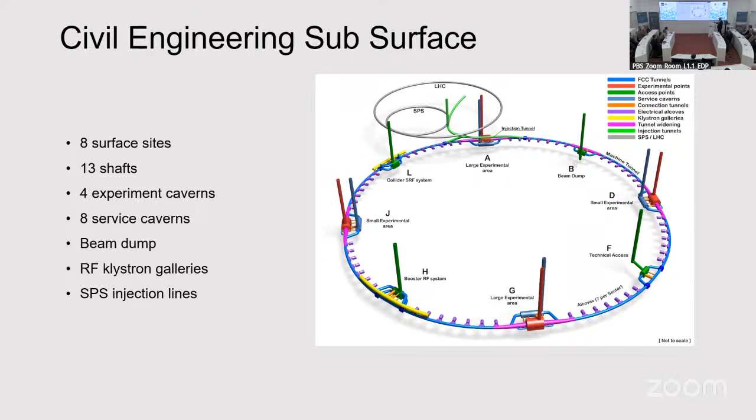This is the new one with 8 surface sites, 13 shafts, and big discussions ongoing whether there'll be 4 experimental areas you see in red or 2, and lots of various little tunnels for services, which I won't explain today. But our biggest job at CERN, one of the challenges, is deciding what size tunnels do we need.

So the physicists come along with the project, we want a cost estimate immediately, but we have to say, hold on a second, how big the tunnels need to be, which needs a lot of integration studies for ventilation systems, for transport, for the cable trays, etc. So it takes a long time to decide what's going inside the tunnels. Then we can give cost estimates.

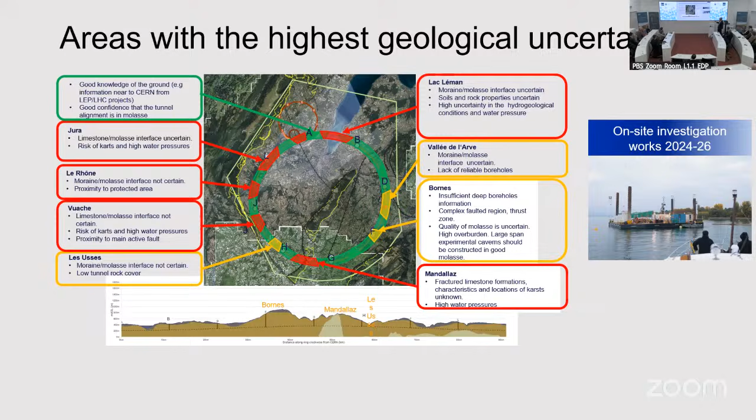So we're doing a lot of site investigation in the areas with the most uncertainty. We're doing, for example, you see between shafts A and B underneath Lake Geneva, 4 drillings in the lake. In the bottom left, you can see the long profile. So between shaft A and B, the lake is the depression. So making sure, for example, in that location, that we're in the good molasse rock and we're not going through the glacial deposits underneath the lake. And it's similar in the other areas to really understand the geology in these critical areas.

There's also a plan, possibly the most feasible, to reuse the existing tunnels. We'd have to install another electron machine called LEP3, which will mean making the tunnels bigger again at CMS and Atlas, and doing a lot of refurbishment work to upgrade the tunnel to make sure it lasts another 50 or 60 years.

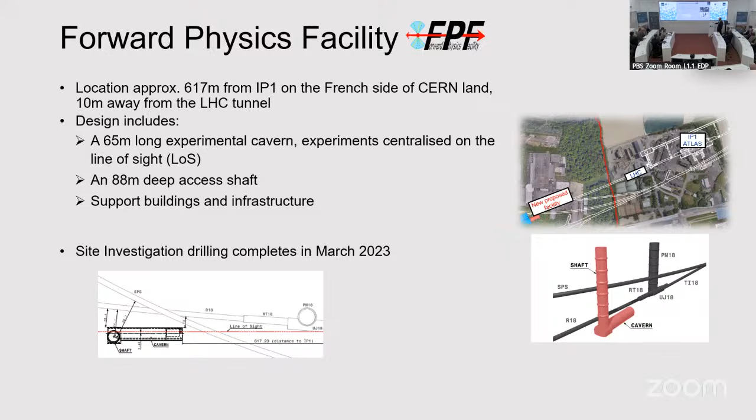The physicists are not short of ideas. They also have many other collider projects we're looking at, much smaller, but still a few hundred million - not the bigger ones I talked about, but a lot of other ones ongoing. Just one example is called the Forward Physics Facility, which needs a new shaft about 90 meters deep and a new cavern for a dark matter research facility. We did site investigation to look at the ground conditions for the new shaft.

We also work internationally at CERN on many other projects around the world. For example, we're working on a linear collider project in northern Japan, just north of Sendai. And probably more interesting for Europe is a project called the Einstein Telescope, which is really taking off quickly - there's a lot of EU money in this project for site investigation phases.

It's nothing to do with CERN. It's a tunnel about 10 kilometers, triangular shape, very, very deep, and it has to be very, very quiet. It's a system of lasers and mirrors to measure gravitational waves from space - not an accelerator, just measuring what's coming from gravity. There are 3 proposed sites at the moment: Maastricht, Eastern Germany, and Sardinia. These 3 sites are being considered for which one will eventually be selected, but there's a lot of money going into this, and more than likely it will go ahead.

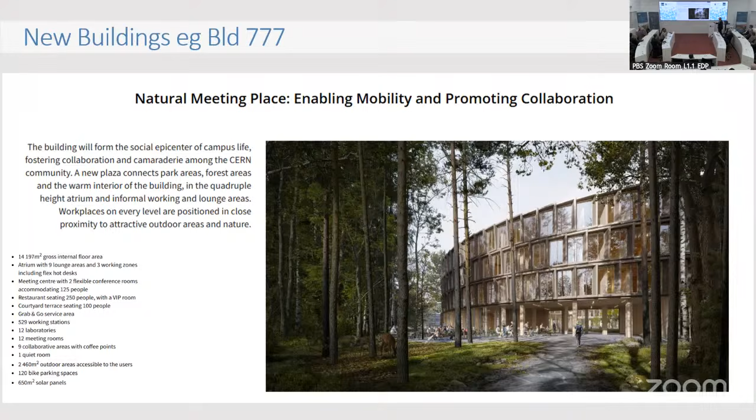I've talked about the underground, but I could talk forever about the surface buildings as well. We do a lot of work - we have 600 buildings on the surface. We just started a new one on our French campus now called Building 777, a very modern wooden type structure.

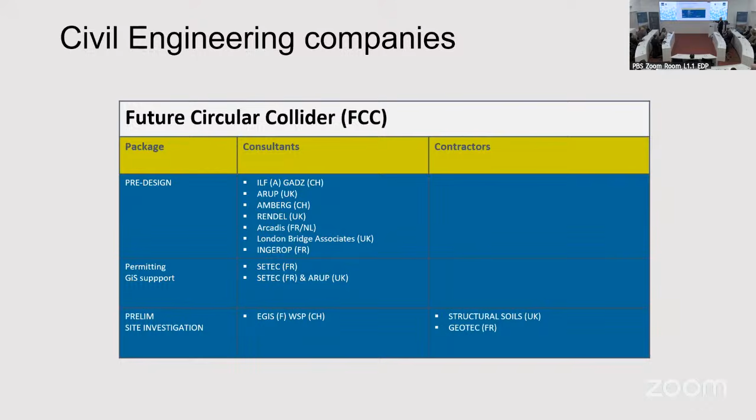Lots of work for companies at CERN. We normally do FIDIC type contracts with full design by consultants and contractors doing the execution. That was for the Large Hadron Collider, about 600 million. Now we're looking at the future circular collider, which the civil engineering estimate is between 5 and 6 billion Swiss francs. We have a lot of consultants on board doing the pre-feasibility design, looking at spoil disposal, geotechnical aspects, geology, etc. We've placed a couple of contracts with 2 companies for the actual drilling and geophysics, but there's more coming out all the time, so any companies interested in work, there's lots more coming up.

The last slide is a plug for people. CERN's not just about contracts, also about people. We employ 10 times more engineers and technicians than we do physicists, so there are many, many jobs for civil, mechanical, and electrical engineers, lawyers, accountants, firefighters, etc. So if anybody knows any young people who'd like a job at CERN, there's a website there - I can get in contact with us.

Yes. 60 seconds and we can all go network downstairs.